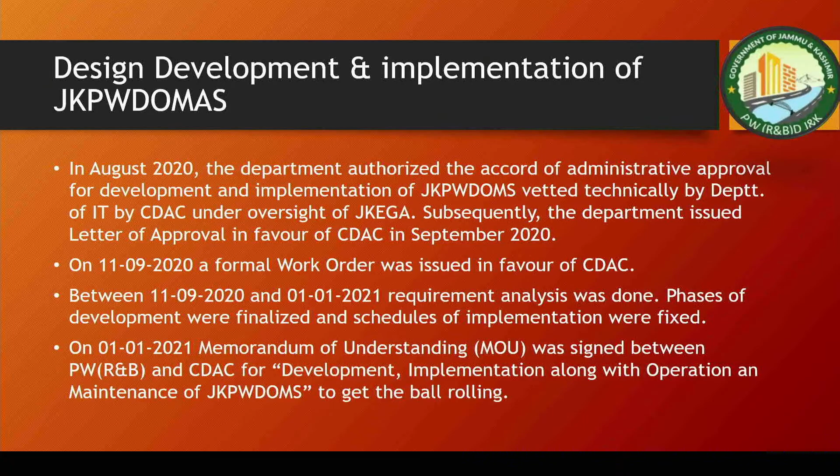So what was the scope? Scope was development of a web portal, then capacity building, change management, third-party integrations, API sharing, and operation and maintenance for 3 years after development. It was decided in August 2020, and CDAC came to an MOU with us on 1st of January 2021.

What are the different modules? Human resource, contractor management, infrastructure management, project proposal, tendering BOQ, project execution, quality control, safety audit, billing auditing, grievances, snow clearance, maintenance, mobile applications, letters and circulars. These are the different modules of JKPWD OMS.

So what is JKPWD OMS doing there? Enhancing accountability and transparency, operational efficiency, financial accountability, comprehensive project monitoring, strategic planning, data-driven decisions. These benefits are for the government, and for the general public, ICT enables people to participate and give feedback, transparent communication, grievance redressal, efficient snow clearance.

As of October, we have more than 16,000 employees whose data regarding their transfers, their posting history, their addresses, their qualifications are computerized and recorded in the system, and roles are given as per their designations. More than 2,500 bridges, 11,000 buildings, and 30,000 roads comprising 42,000 kilometers length.

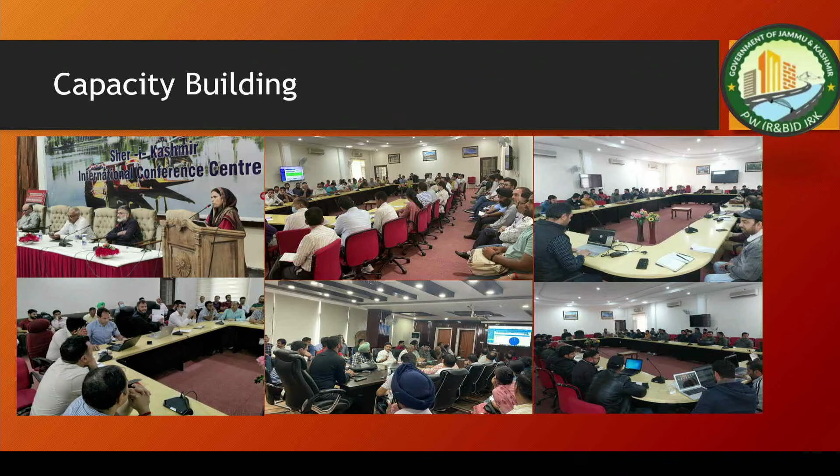There were so many bottlenecks which we had to tackle. One of them was capacity building, and it was a big challenge. Capacity building was the first and foremost thing for automation of this e-governance initiative, especially vital for users, that they should be well aware of the automation processes, taking full advantage of the software development. We have done capacity building in 8 phases. We visited every circle of the PWD J&K, where we conducted more than 240 trainings. Around 1,800 master trainers we have created in every zone, and more than 250 contractors were also trained.

To bring any change from the conventional method to this IT-enabled method, the crucial role is always with the heads of the management. They should be motivated first, and the will to do it has to be there. Once these two factors are there, it is an easy affair to make the change.

Overcoming the challenges: there's privacy and security, interoperability, because there are so many other IT initiatives in J&K and at the national level which need to be integrated with the system. We are working on them, and some are already integrated. There were challenges of training and infrastructure, and overall implementation of ICT.

As already discussed about privacy and security, we have to rethink information security policies, overcoming challenges every new day. There is a challenge related to security for all software, not for JKPWD OMS only, but for all software worldwide. So, how to mitigate them? Implement important steps of reviewing the existing information security policies and developing a new policy statement addressing the risks to electronic information.

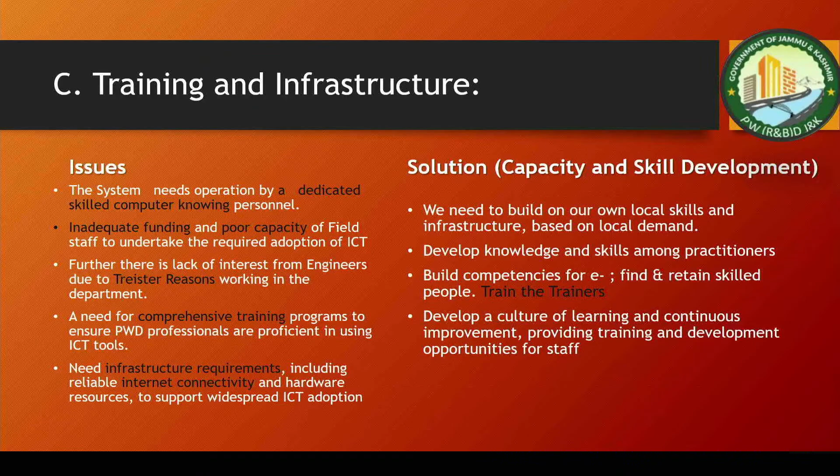There are areas to upgrade infrastructure also, where we are currently doing that. We are upgrading our servers, robust firewalls, and endpoint protections. So, in this implementation, the issues were inadequate infrastructure in the early phase, insufficient access to internet by the majority of the population, lack of requisite skills to use them, lack of resources, lack of a comprehensive policy on ICT. So these are the solutions we are working on right now,

and we have future strategies like using platform as a service, software as a service, mobile platforms, smartphones, geospatial data. We are moving towards integrating JKPWD OMAS with PM Gati Shakti, using IDs for our road infrastructure, and the same unique IDs will be transferred to PM Gati Shakti for integration. And we are hoping for integrations with NCOG, Darpan, Pragati, these different web portals, central government initiatives. And these recommendations are for our state.

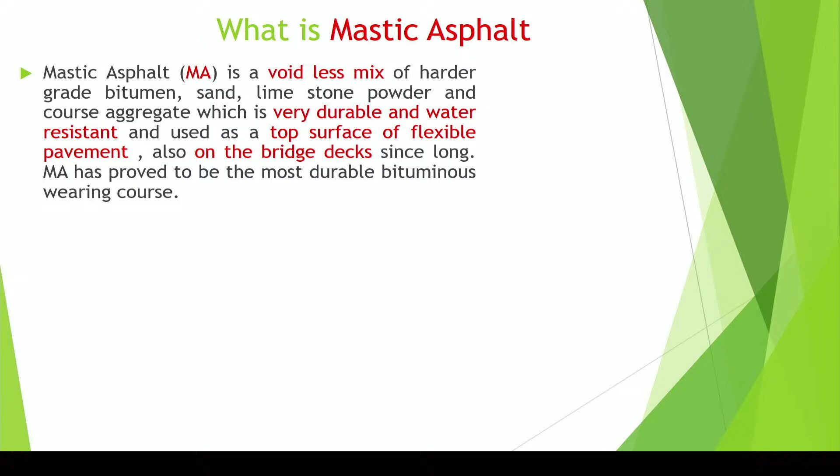Mastic asphalt is a voidless mix of harder grade bitumen, sand, limestone powder, and coarse aggregate, which is very durable and water resistant, and has been used as a top surface of flexible pavements and also on bridge decks worldwide for a long time. Mastic asphalt has proved to be a very durable, rather the most durable, bituminous wearing course. It has been successfully used in the city roads of Kolkata and other parts of West Bengal since the 1980s, especially in areas with waterlogging problems.

It is used as a wearing course on bridge decks, as I've already told, all over the world, and also in our capital city of Delhi. I have seen the application of mastic asphalt in the roundabouts and parking bays. In Europe, mastic asphalt is very popular. In many countries, mastic asphalt is being used. Especially in Germany, the terminology is a bit different. They call it gussasphalt, and they are using it on their autobahns, their expressways.

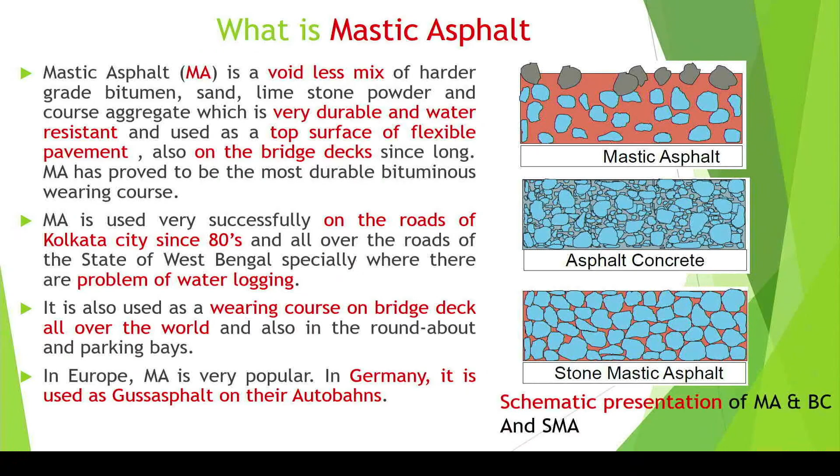Also, this is the schematic of mastic asphalt compared with other dense graded mixes. In mastic asphalt, the specialty is that the continuous phase is the mastic, with a higher percentage of bitumen and also filler and fine aggregates. That's why it is water resistant. In the other varieties, we can see some percentage of air voids is specifically kept, and in stone matrix asphalt, the main philosophy is stone-to-stone contact, thereby achieving a rut resistant wearing course.

Some pros and cons of manually laid mastic asphalt: because conventionally it is manually laid, the initial cost of mastic asphalt is a bit more compared to other bituminous mixes like BC or SDBC.

But the life cycle cost, if the durability of the mastic asphalt is more, if the life cycle cost is seen, it is around 10 to 15 years. I will show you photographs where we have gone up to 30 years even. So that way, life cycle cost from that angle has to be seen. If a well executed mastic asphalt, it can give you life without any maintenance for 5 to 7 years.

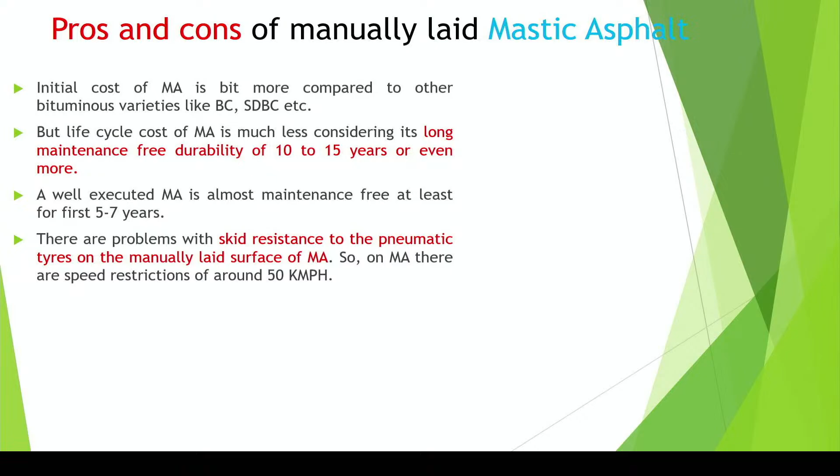There are problems, but the main problem with manual mastic asphalt is the skid resistance, because the anti-skid materials are grafted manually, and after some time these anti-skid materials disappear. So speed restriction is there, especially in the rainy season for two-wheelers. The safety issue is there.

But the main problem is from the environment point of view, because manual mastic asphalt is being cooked in a very small cooker without any environment pollution control units fitted in. So a lot of air pollution is occurring. The workmen are also exposed to the fumes continuously coming up from the mastic asphalt.

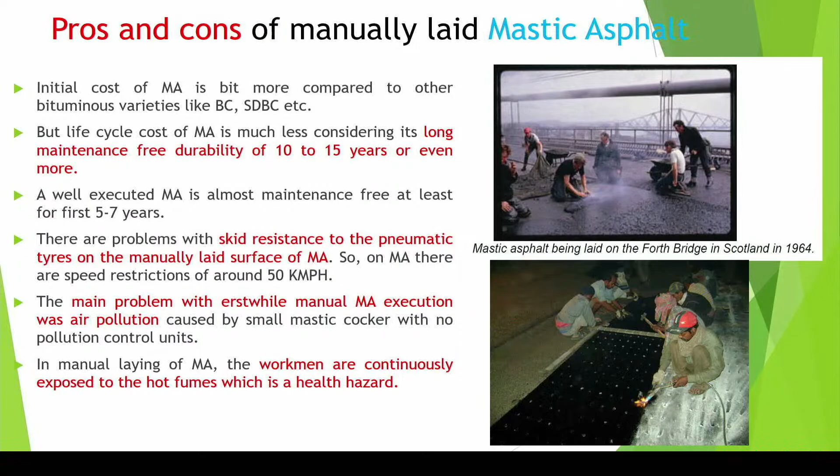The photograph is showing this from Scotland in the year 1964, and this is the kind of work we are doing so far in our country.

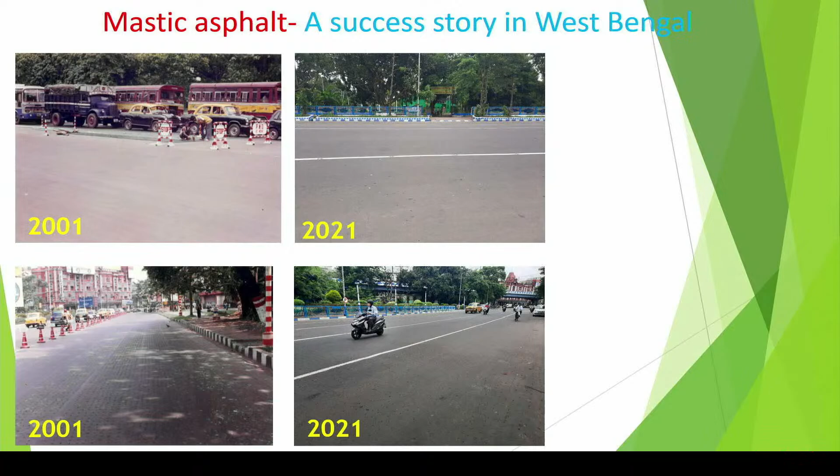The lower photos are of the other end. This is the famous Mayo Road in the Maidan. When this was done in 2001, I was actually an assistant engineer. I undertook this project, and still now it is going on without any maintenance required. So that is the beauty of mastic asphalt we have actually experienced in the city of Kolkata.

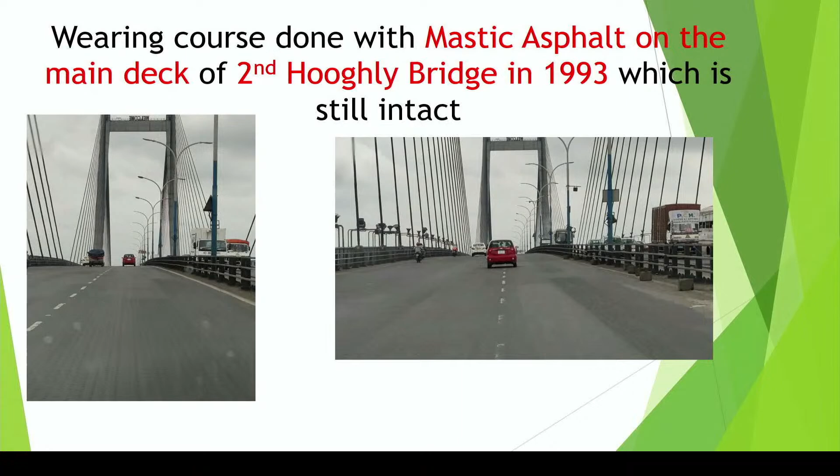The same thing was there in the famous second Hooghly Bridge, the Vidyasagar Setu. It was built in 1993, and till 1.5 years back, it has been renewed. So 29 to 30 years it has given service, this mastic asphalt.

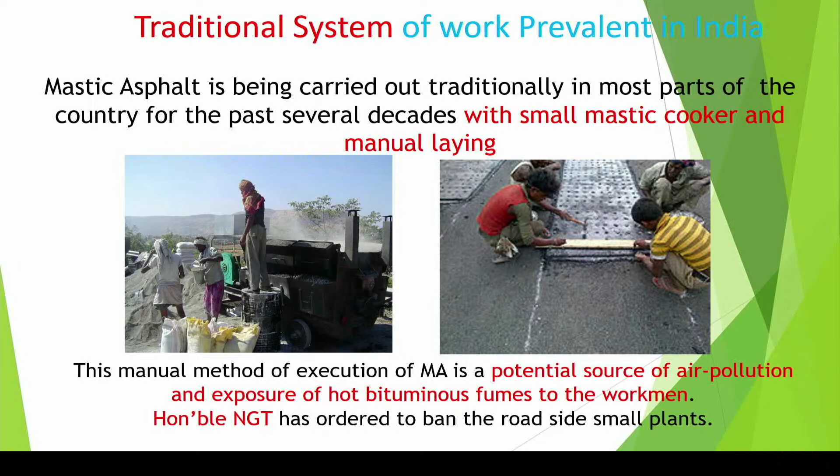But this is the traditional system prevalent in India for executing mastic asphalt. This is the way we execute it. I have already discussed the problems, and because of that, the Honorable National Green Tribunal put a ban with an order on 18th September 2018. They put a ban on all hot mix plants.

After that, in 2020, we could establish before the Honorable NGT that not all hot mix plants should be banned, because worldwide this hot mix asphalt technology is being adopted. After proving this, giving documents to the NGT, they verified it from CRRI and Kharagpur IIT, and they allowed us to use the hot mix plant.

But as per the recommendation of the CPCB, Central Pollution Control Board, they put a ban on the spot mix plant, roadside spot mix plant, where your small mastic cookers also come. In the meantime, we proved in the National Green Tribunal that we have taken up so many environment friendly works like micro surfacing, white topping, and this one also.

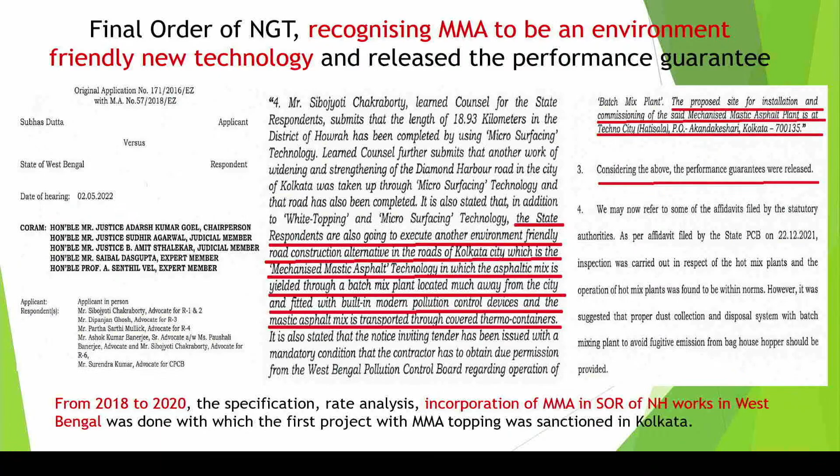In the meantime, I prepared all the technical documents, collected the rates, especially the mechanical part of it, formulated and got it incorporated in the SOR, and we took up one project in Kolkata, especially under the push, I should say, of the NGT. We had to take it up.

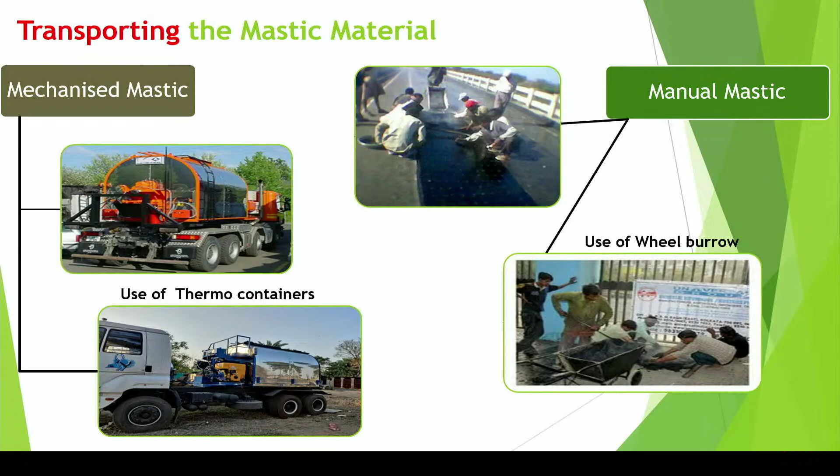And laying of the mastic asphalt is done for the mechanized version with a paver, so naturally the riding quality is improved. Whereas for the manual process, since it is manually laid, there are issues with riding quality.

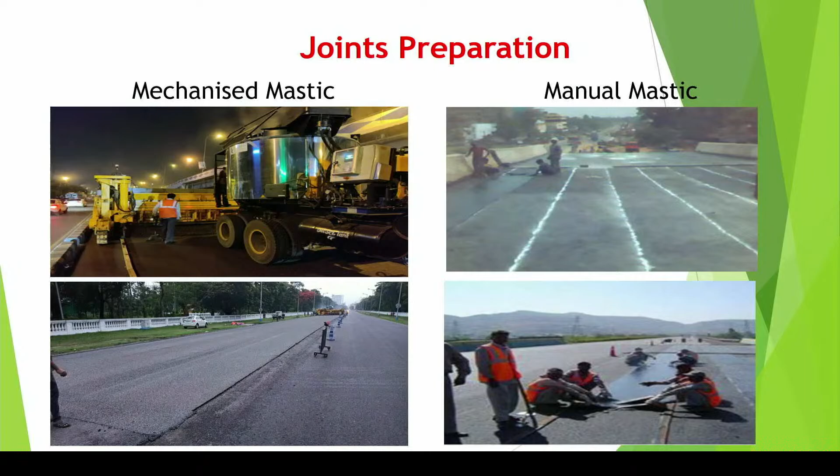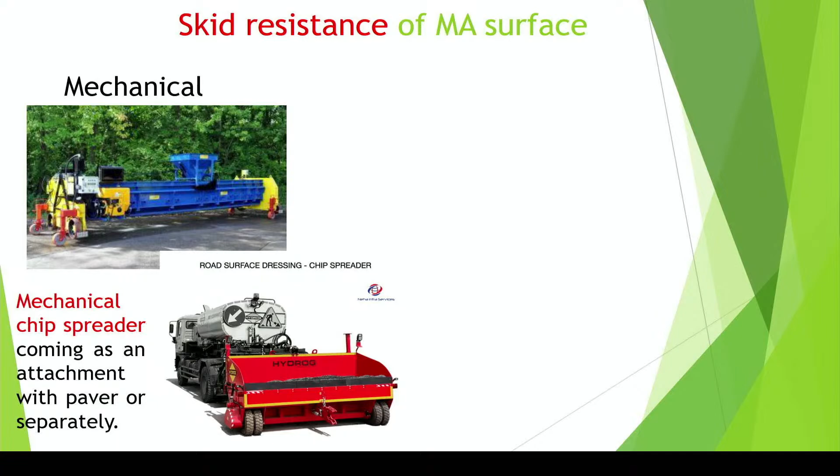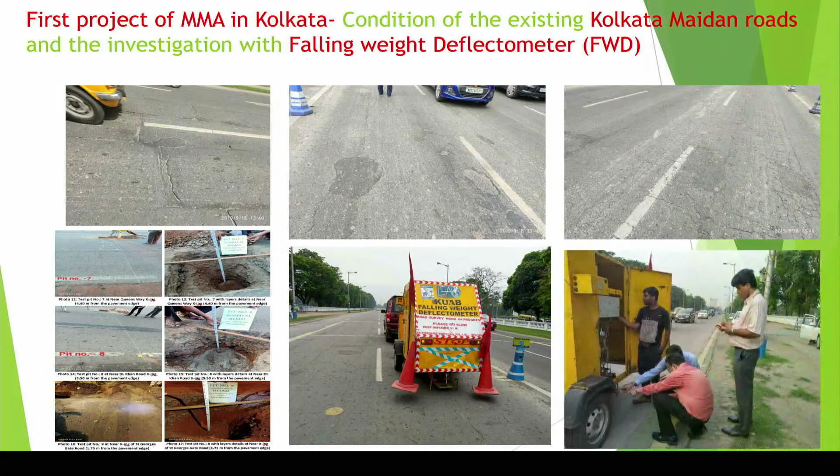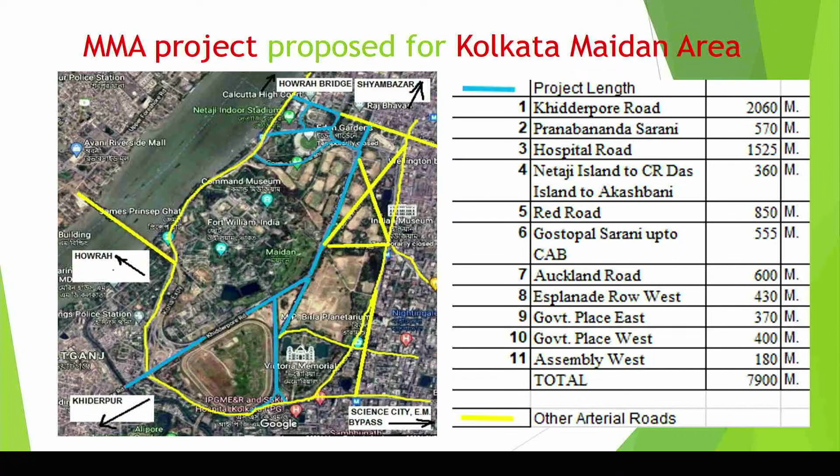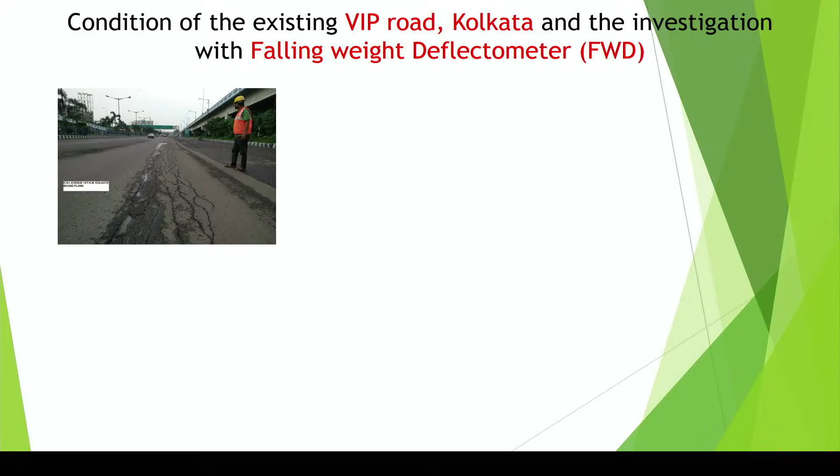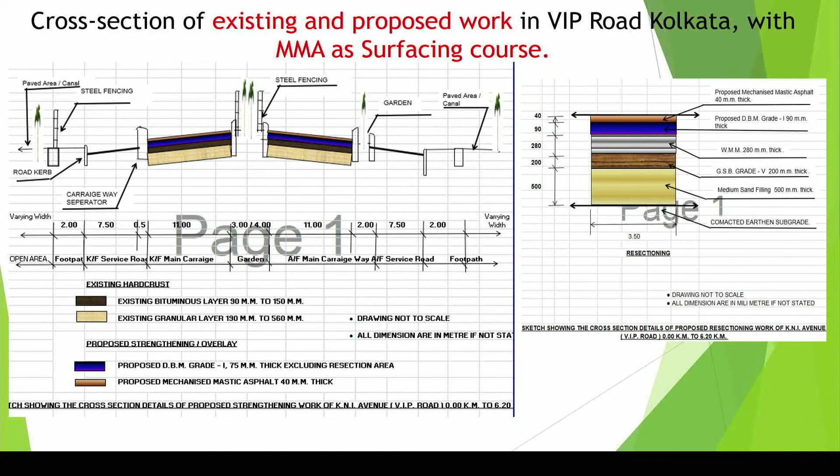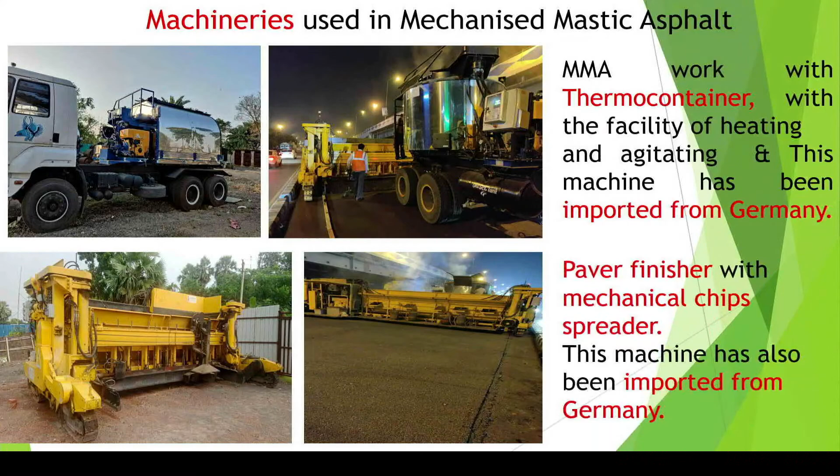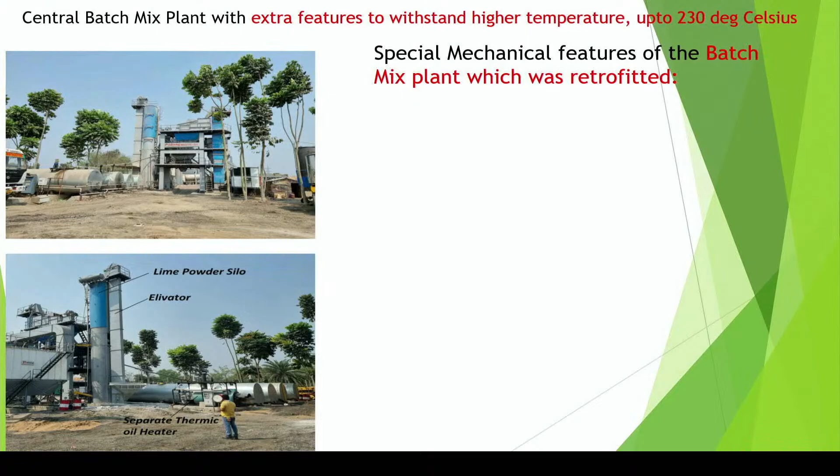One thing is that in a normal batch mix plant we deal with a temperature of 150 to 170 degrees Celsius, whereas for mechanized mastic asphalt, the temperature can go up to 230 to 240 degrees Celsius. So a lot of mechanical improvisation had to be made and retrofitted. These are the points on which the mechanical improvisation has been done.

Also, for the mechanized mastic asphalt mix, the percentage of lime filler is much more than in conventional bituminous mix. Conventional bituminous mix has around 2 to 3%, and here it is 17 to 18%. So a large amount of fine material, like very fine filler, has to be incorporated, and the silo has to be made that way to pump this higher amount of filler.

A separate thermic heater has been provided, with insulated asphalt drum, insulated hot bin, optimum raw duct, and there are a few more - the screw conveyor is also equipped with thermal heating, like an insulated hot elevator. These are to take care of the higher temperature.

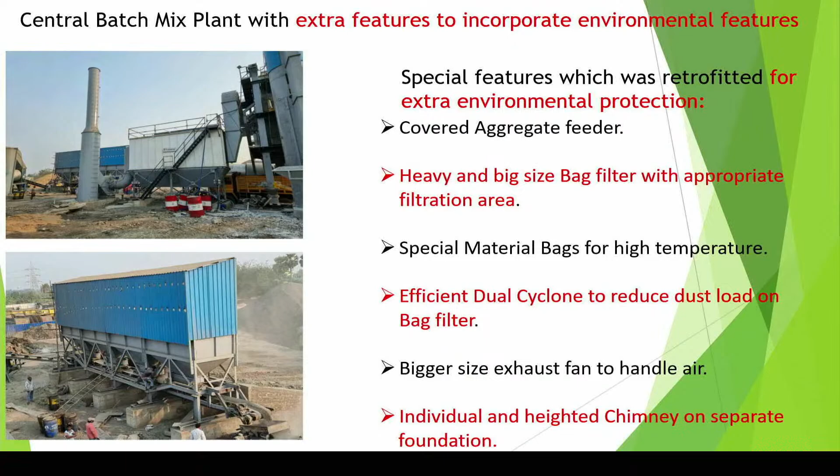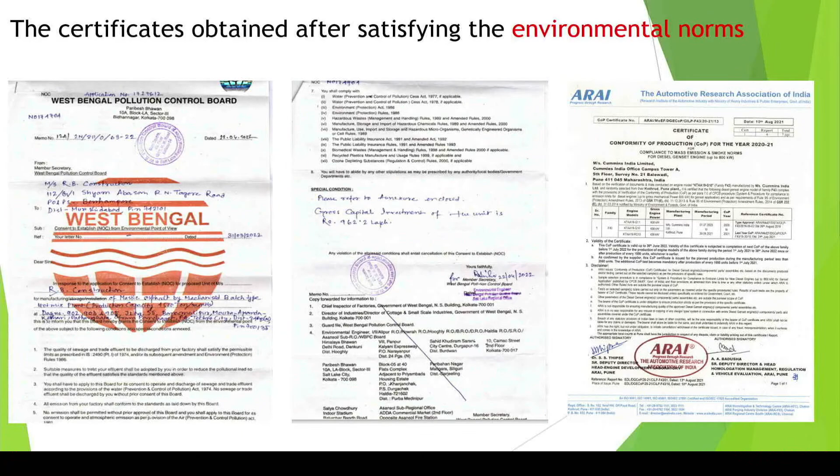For the diesel generator set, we have also obtained the pollution control certificates. Now for the civil engineering aspects of the mechanized mastic asphalt.

The mix design is as per the prevailing norms of code IRC 107: lime powder is around 17 to 18%, river sand 32 to 33%, coarse sand is 40%, and bitumen of industrial grade, much harder grade, is 9.8 to 10%. The criteria for fixing different components is as per the prevailing norms of the hardness number, specified from 10 to 20. But I believe there are a lot of rooms for improving this criteria.

Several other performance-based criteria like wheel tracking test and impact loading test have been carried out. Molds were taken, and IIT Kharagpur was also associated during the execution of this project for development and research work. One student has been assigned a PhD thesis for this. He took all the molds and has taken a break for joining his service, but we expect those molds will be tested soon and all results for the performance test will come.

But on the field, this is what we are receiving. I will show you the photograph. Let me share the photos with you.

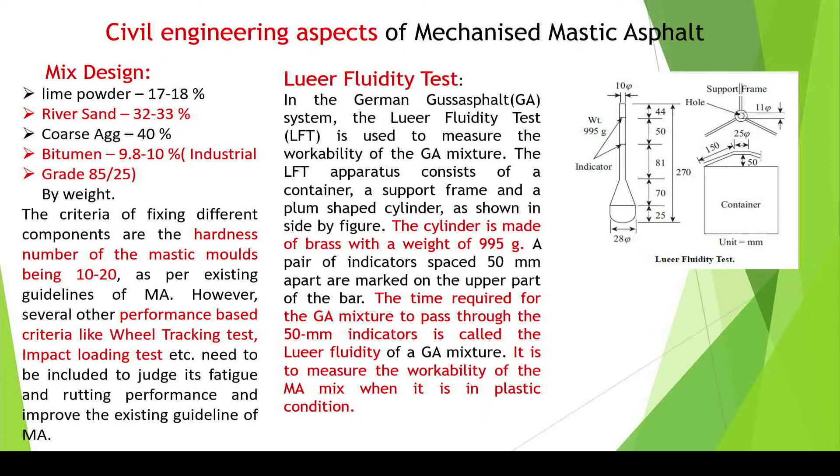Regarding the plastic state of the mastic asphalt, when it is plastic, there is one improvisation made as per the German Gussasphalt system, that is the Lueer fluidity test. As per this photograph, it is a plum-shaped brass cylinder weighing around 995 grams, with a specified 50 millimeter dip. The time noted for dipping this cylinder 50 millimeters defines the consistency of the plastic mastic asphalt. It is also very important for the skid resistance to be embedded, so it is well defined, and there are rooms for research and specifying this criteria.

The very important thing, as I was already talking about, is skid resistance. For manually laid mastic asphalt, the anti-skid materials are grafted onto the surface while it is still in plastic condition, but there are issues with the early disappearance of the anti-skid material. In the code for mechanized mastic asphalt, Professor Bose drafted the previous 2013 version code, and it is specified on the back of that code.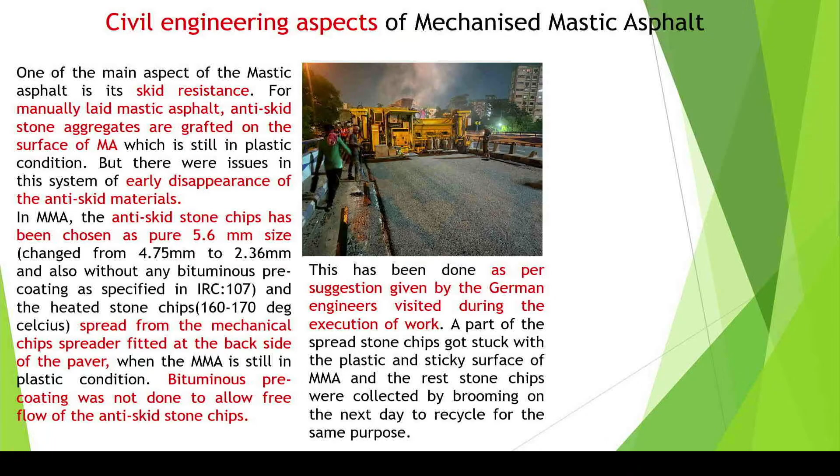We have also done the skid resistance test. IIT Kharagpur has done it, and the results are within the specified limit. This is a video I recorded, and my voice is also there.

Mechanized mastic asphalt is in operation. This is carried by thermo containers and laid on the road by the paver. It is actually a bit different from the conventional pavers.

It is the second of its kind in our country after Mumbai. The paver machine proceeds very slowly; the speed is maximum up to 5 meters per minute.

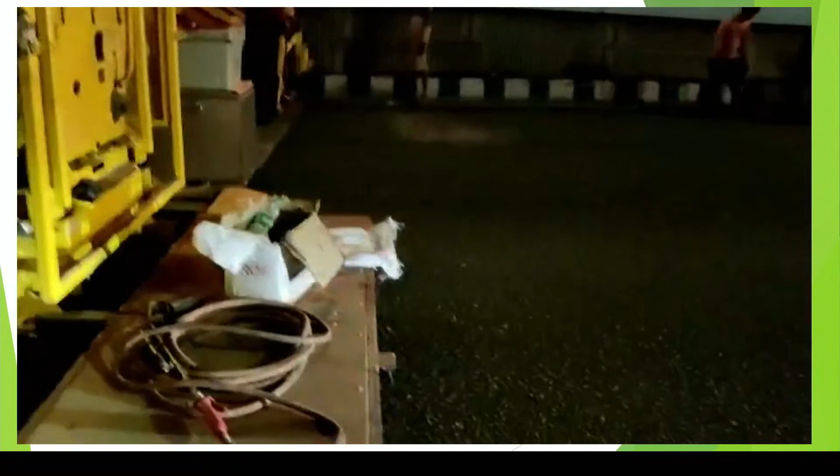You can see the anti-skid chips, stone chips material, being automatically spread onto the surface and getting stuck as the anti-skid material, giving a beautiful skid resistance. I'm recording the video.

One point: in the code, it has been specified that the anti-skid material has to be pre-coated with bitumen, but we have not done that, to allow the free flowing and spreading of the materials. That we have done.

Some of the projects completed in Kolkata city include the famous Red Road, shown here in night vision, and also the iconic Second Hooghly Bridge. The previously laid, 30-year-old manually laid mastic asphalt there has worn off, and this new mechanized mastic asphalt has been laid.

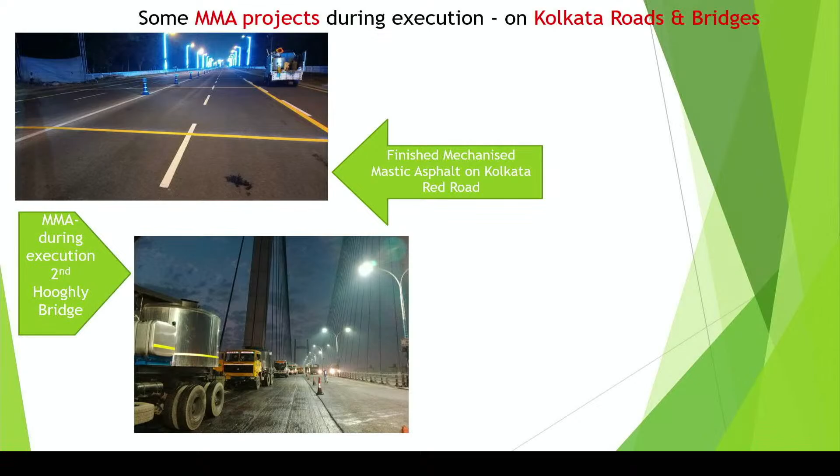And this is also the famous Howrah Bridge. Over that too, the mechanized mastic asphalt is laid.

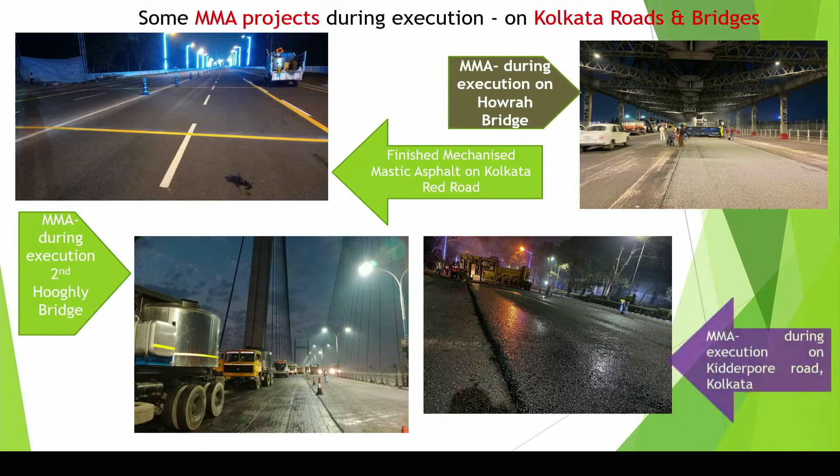And this is another road here, Kidderpore Road, where the mastic asphalt is laid. Now the cost comparison, this is very vital. I'm quickly going through the conventional stone matrix asphalt, comparing apple to apple. So per square meter, for 40 millimeters, it is 550 rupees per square meter.

Bituminous concrete is 503 rupees per square meter. Manual 25 millimeter is 820 rupees, and 40 millimeter is 1309 rupees. Whereas the mechanized version, you can see from manual to mechanized, there is not much difference, because in the mechanical side, the machine part is more, but we have reduced the labor part. So it is not much of a comparison.

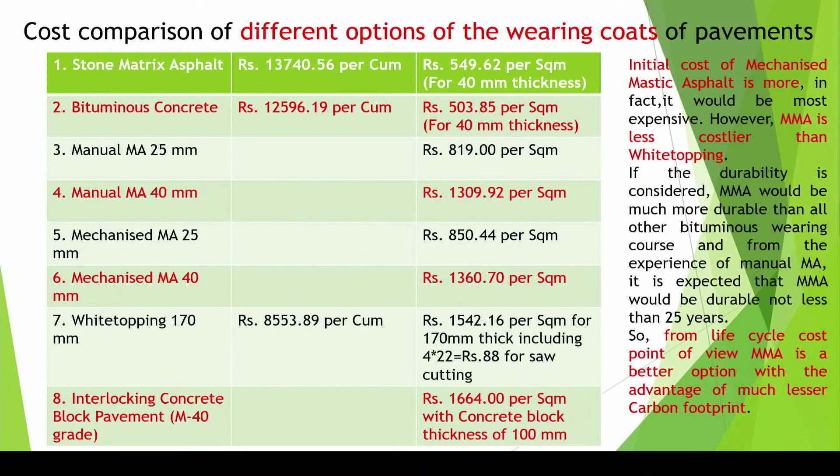So I believe this item, mechanized mastic asphalt, has got a very good potential if we use it. The concluding remarks are that mastic asphalt is a very durable and successful wearing course, which we have applied in the city of Kolkata, with some improvisation from the prevailing norms of the code. It is giving good success for waterlogging areas especially.

Honorable NGT has put a ban on manual mastic asphalt. Manual execution is slower, and the riding quality is also an issue. Mechanized mastic asphalt is an established technology, extensively used in Europe, where environmental pollution is kept within permissible limits, the rate of execution is much faster, and the riding quality becomes very good. Kolkata is the second city after Mumbai in our country for execution of this mastic asphalt.

Considering the durability and life cycle cost analysis, mechanized mastic asphalt is very good, to conclude. This is the last slide. There is an international mastic asphalt association also. Almost all European countries are members of it, and China and Japan are also members.

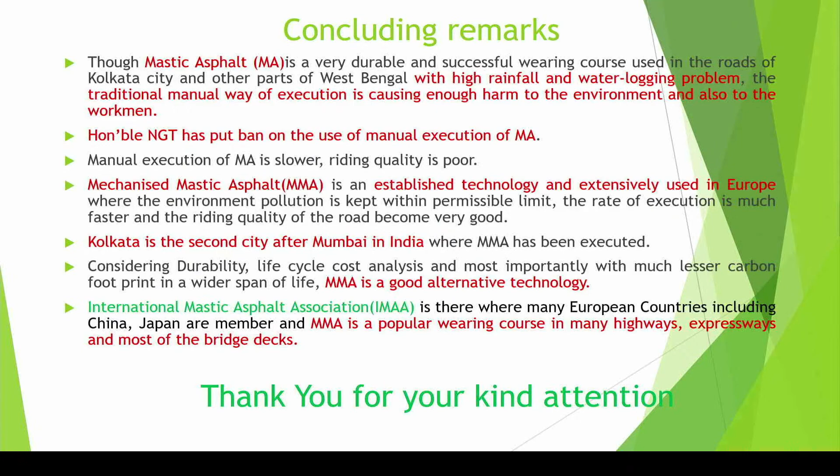This is a very important and useful presentation, because normally we avoid using mastic asphalt due to the lot of manual processes required, cookers and all these. Now he has suggested using mechanized mastic asphalt. So now the floor is open for questions, if any, and comments.

Take the questions on this presentation, if any, on both lectures. I can wait and take the questions right now, but I will seek the permission of the respected chair, because I have to go for a meeting, so I may have to leave with DG sir, so I may leave in between the session. Myself Premnath, superintendent engineer from Bihar Road Construction Department.

Sir, it is very good to apply mechanized mastic asphalt, but there are two challenges. One is retrofitting of the batch mix plant, which is a big problem. Second thing is educated operators. These two things are big challenges for the road sector.

Naturally, you have to face challenges if you want to do something good. So challenges you have to face, but what I believe, it is all in the mindset. If we believe it will be implemented, you can. Regarding retrofitting approval, it is not there specifically; we have depended on the end result. We have got the pollution control board certificate, where all environmental norms have been satisfied.

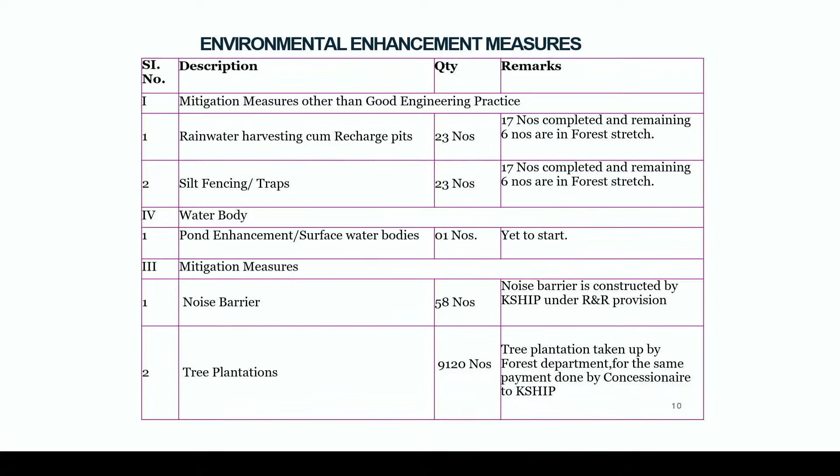In high embankments, retaining walls are constructed along with toe walls.

Bioengineering measures include vegetation in conjunction with civil engineering structures, shrub and tree planting, roadside avenue planting, brush layering, and grass sods like vetiver grass used on slopes wherever high embankments are present, to prevent soil erosion.

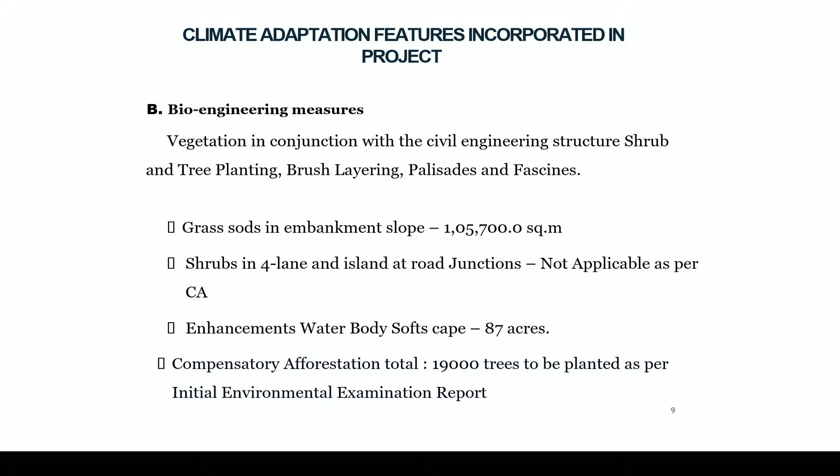For water body enhancement, one big lake of 87 acres has been chosen, along with compensatory afforestation. A total of 19,000 trees have been proposed for planting, and almost 90% of them have already been planted.

Sound construction management and mitigation help reduce carbon emissions, with sequestration achieved through natural processes like afforestation and borrow pit restoration, while preventing unwanted activities like hill cutting in forest and wildlife areas.

About 18 kilometers of forest has been taken up for improvement in this project, where around 12,000 trees had to be cut due to realignment. Due to a recent decision by KSHIP top management, they decided to go with the existing alignment so the number of trees cut could be reduced to 2,000, which have no significant forest value. That is one measure they have taken.

We have to preserve trees because they already exist along the side of the road, with a lifespan of 50 to 100 years or even more. It is very difficult for us — for three generations we would lose the benefits from the trees if we cut a larger number of them.

Moreover, speed restrictions in the forest area are definitely going to be imposed because of wildlife movement, which would otherwise get disturbed. In elephant corridors or other eco-sensitive zones, speed restrictions will be up to a maximum of 40 to 50 kilometers per hour, and we cannot travel faster than that.

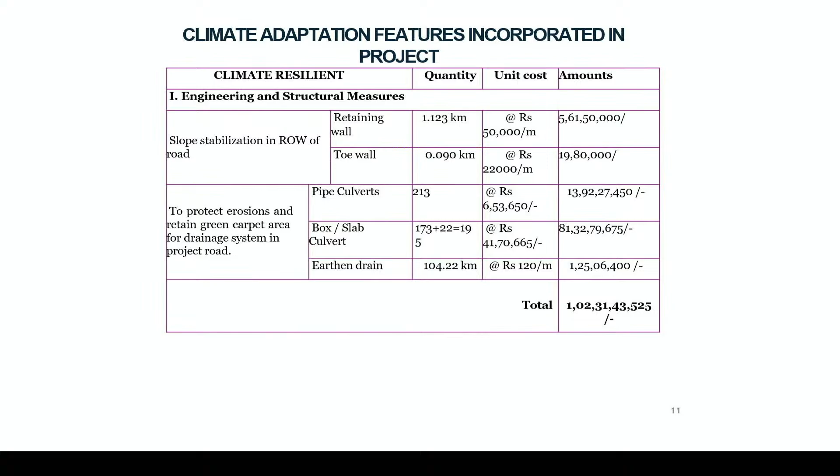And these are the bioengineering measures. Grass sods, that is vetiver grass, have been provided, and borrow management: after the gravel has been removed from the agricultural fields wherever the agreement was done with the farmers, that was made good to cultivate again, to start the farming activities. So in order to prevent the soil erosion, that was restored.

Then water body enhancement: in that, desiltation of pond, stabilization of slope by vetiver grass, phycoremediation of water using algae, turfing, and sitting arrangements with walking track, pathway, playground for children, and some important plantation will be done there.

So impact identification and assessment. During the initial environmental examination, the soil, noise, water body, parameters affecting the quality of water, the soil contamination, the erosion of soil, all those factors are being studied, types of soils and all.

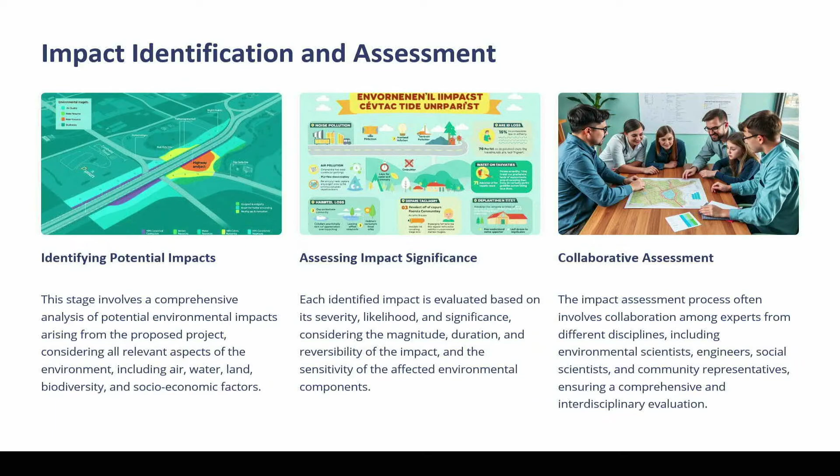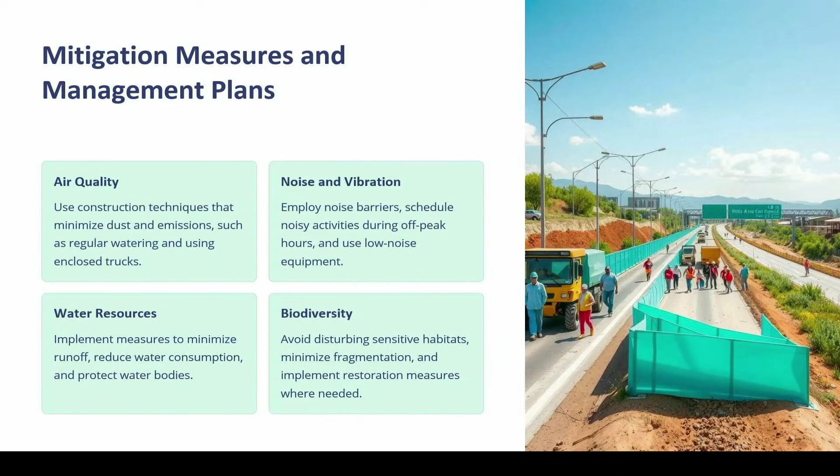So mitigation measures: air quality has been tested during the preparation of the initial environmental examination, and during the construction phase, every quarter air quality parameters have been checked, noise and vibration parameters have been studied, water quality has been tested for the surface water as well as groundwater, and biodiversity has also been studied.

So during the construction activities such as vehicle emissions, dust will come because of the excavation and embankment, rolling of the embankment and all. So water tankers and sprinklers will be used to mitigate the dust. And increased traffic volume from the highway worsens air pollution levels; that will also contribute to the PM 2.5 and PM 10 because of the dust, and that will affect the public very severely.

Noise levels also will increase because of the machineries, and after completion, the density of vehicles will increase, so it will significantly contribute to the noise. And water resources: water quality will get affected because of the soil erosion and other things.

So these are the water resource management and water quality monitoring. Water quality monitoring is some 20 parameters as per IS 10500. As per the IS code, the 20 parameters have been studied and measures have been taken. Stormwater management: due to runoff, the soil erosion will be there. To prevent the soil erosion, sufficient measures have been taken, and I'll show you the photographs.

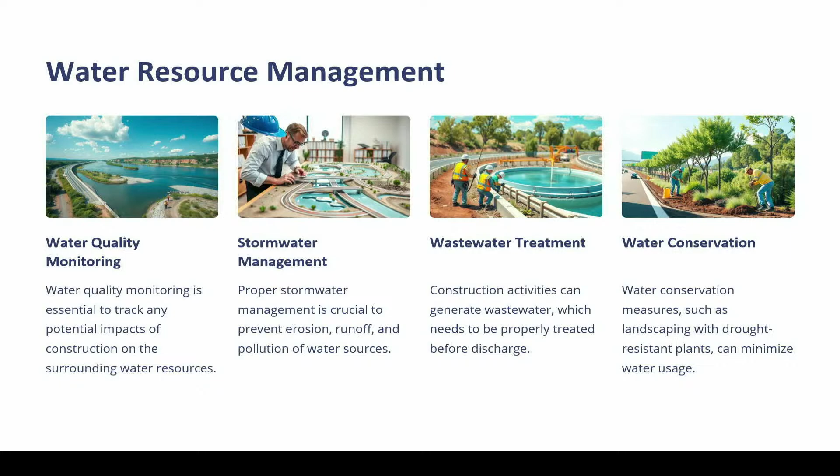Construction activities can generate wastewater in the labor camps, and that wastewater will be treated and reused. And water conservation, like landscaping, drought resistant plants, minimizing the water usage, and also the lake development will be there. Soil and land use management: vegetative stabilization, sediment control structures.

So construction waste: after scarifying, whatever material will come, that will be reused, and safe disposal will be done. Waste reduction.

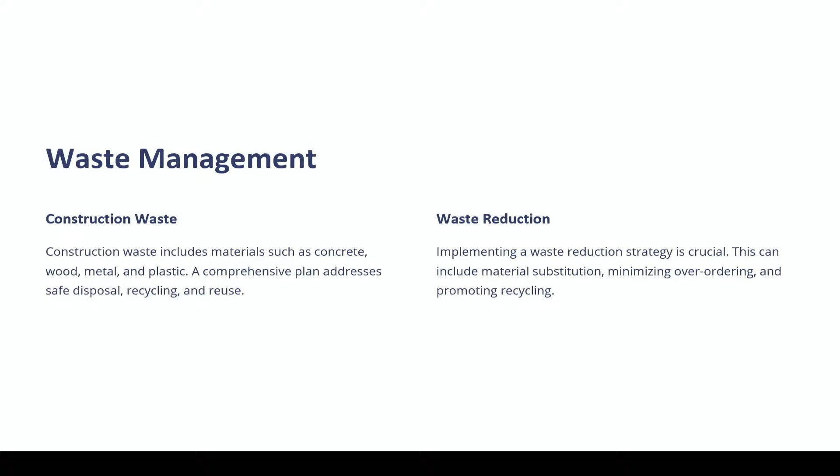So occupational health and safety. Safety of the workers is of prime concern during the construction project. Those safety aspects have been taken care of by providing helmets, earbuds, and other safety gears. Safe equipment operation was observed, and hazard identification and control by using safety features like barricades, markers, signboards and all. Then confined space entry procedures have been incorporated here.

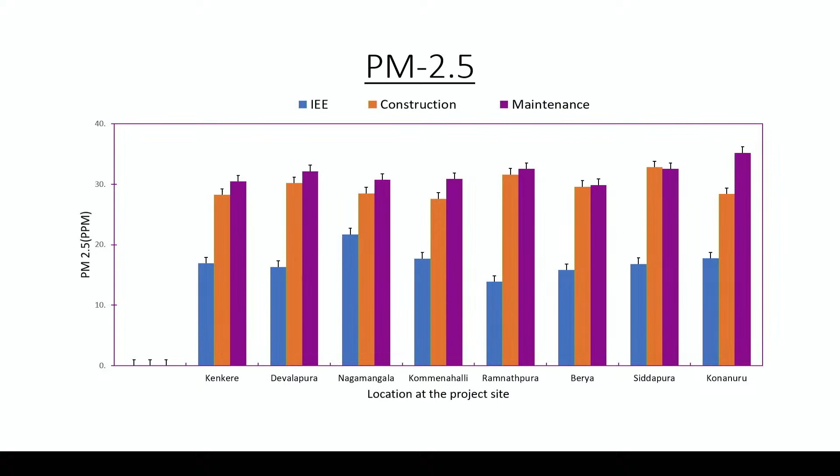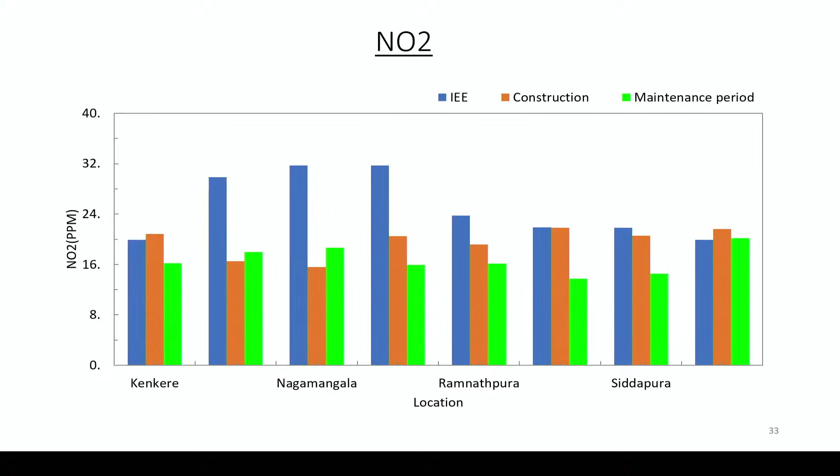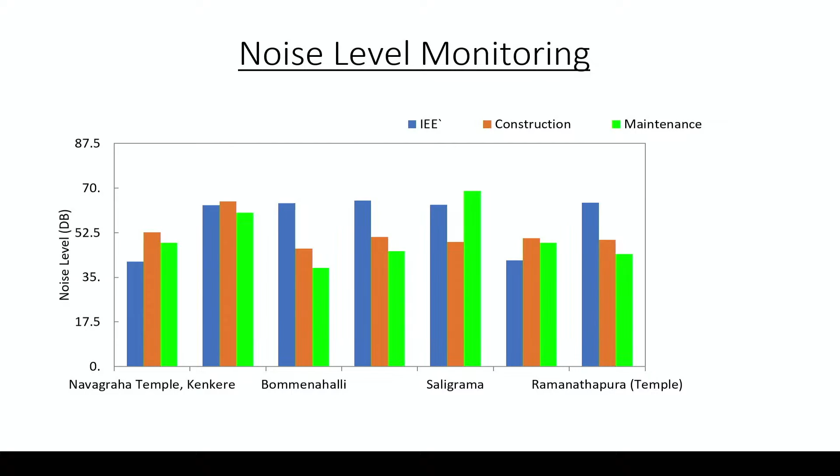Sir, please conclude. Okay.

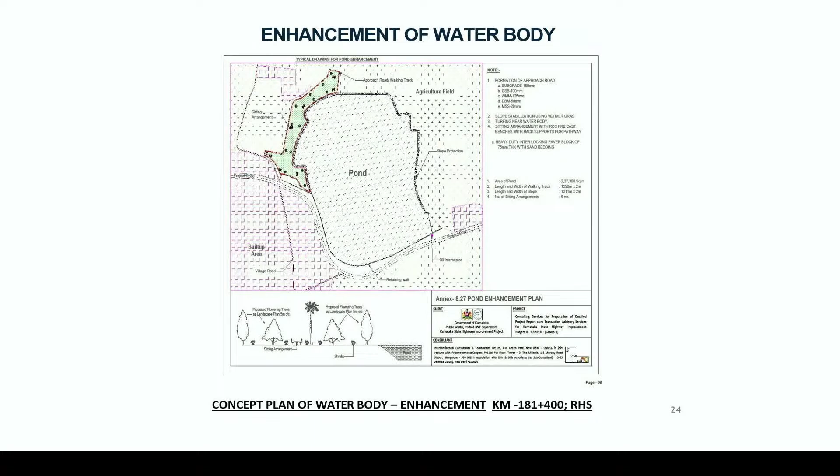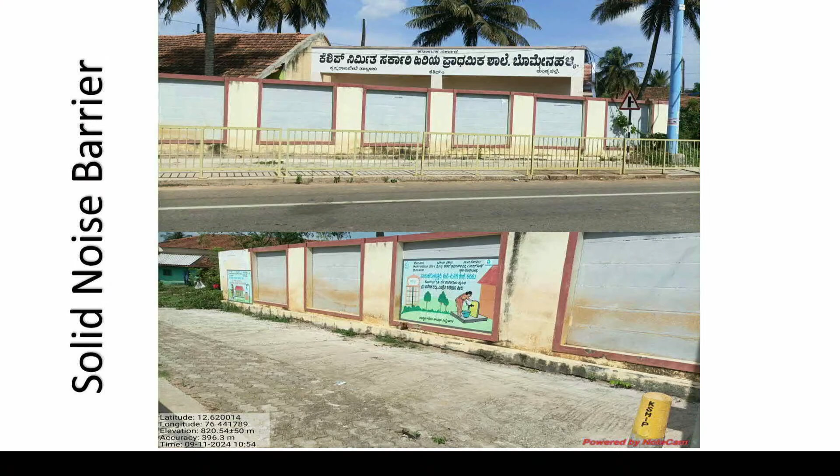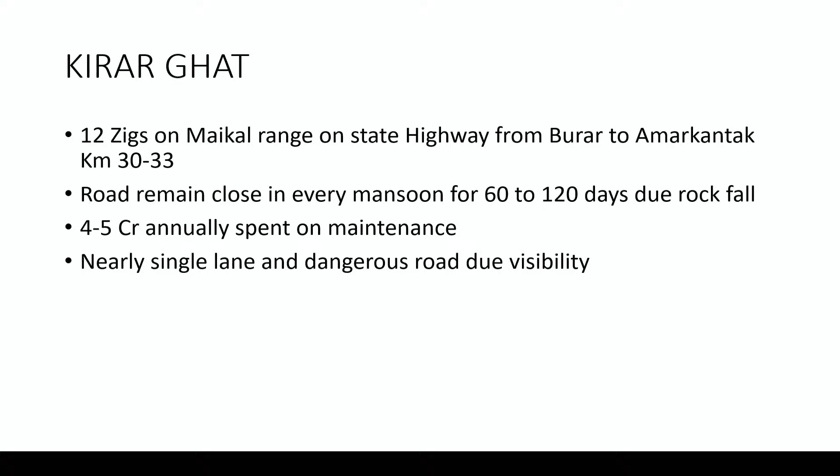So quite dangerous road. It used to remain closed for more than 60 to 120 days in every monsoon because the hill used to collapse, a lot of rockfall used to occur, and with that nearly 4 to 5 crores of annual maintenance used to occur every year for the small stretch. And the lane was reduced to nearly a single lane, very dangerous and with low visibility, like stopping sight distance and then overtaking sight distance. You forget about that thing.

So here, with the inspiration, we have gone for the Navachar. This is the new thing which we have done - toe wall and abutments on micropile and rock anchorages. This is to reduce the foundation cost. This is a really fantastic thing. I invite my research scholars to study this in detail. Although MANIT PhD scholars and MTech thesis students have already taken up these topics and few are working on it, together we can really reduce the cost of construction. Secondly is the anchor bulkhead breast wall.

This is really new. We have studied these things in our textbook - bulkhead supported retaining wall and the breast wall - but in practice we don't use it much. Whereas if you see that section, it becomes very thin.

And thirdly is the road safety wall using Z-shaped anchor.

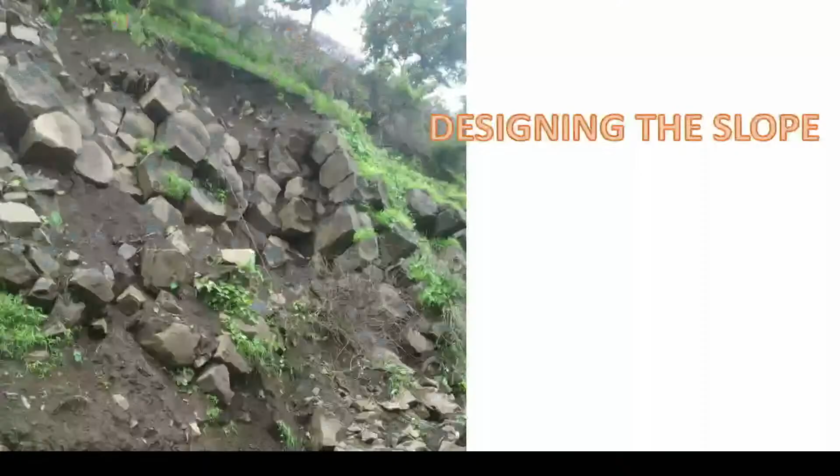As you can see, it's all bulging. So the pore water pressure - these are all big stone boulders weighing up to 20 to 40 tons. They used to fall with one small rain. So the slope was very dangerous, and you can see the curves are very acute, so very difficult.

And if you see, the strata is very, very fragile - even with the movement of monkeys. There is a Hanuman temple here, so with the movement of the monkeys also the stone used to fall. So forget about the rains - you can see the size of the boulders over here, and it's a fragile slope.

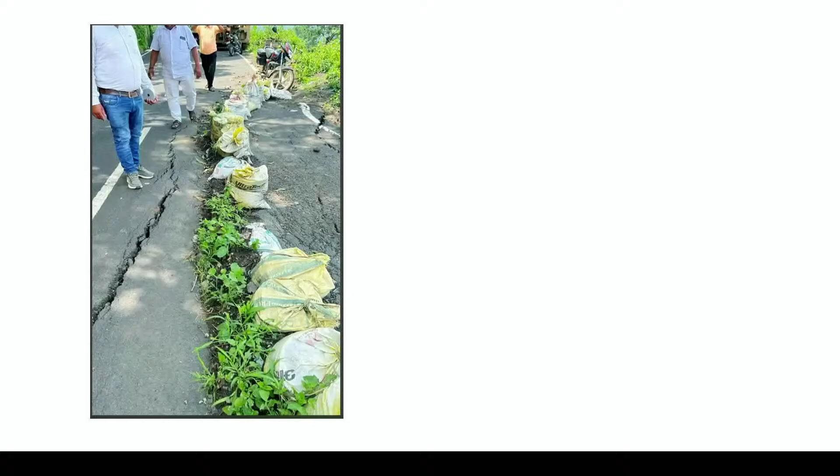You can see we tried to protect - we kept this so that at least small debris should not fall directly onto the vehicle, but that was also inadequate. And laterally we see a lot of slippage because the valley side slope was very, very weak. So there used to be slippage. Even if you construct a small retaining wall, it used to get tilted and collapsed. So these were the conditions.

So accordingly we have deployed so many teams. We have taken certain steps - firstly the geological study using our geological investigation survey map. In Madhya Pradesh we have a GSI institute. We have taken help of that, and help of many people.

Identification of the problem, design the solution, design the drainage system, soil nailing, rock bolting, open mesh jute geotextile, wire mesh, wire rope, toe wall on micropile, modified gabion wall, and turfing.

So after putting some effort, you can see a glimpse of that thing. It's a partially done work. Immediately during the monsoon, the slope turned green. And I tell you, in spite of the heaviest rainfall here - this area, our Kirar Ghat, is famous for very, very heavy monsoon, and this year particularly it had torrential rain - but not for a single day was the traffic ever blocked. Even a small stone was not moved.

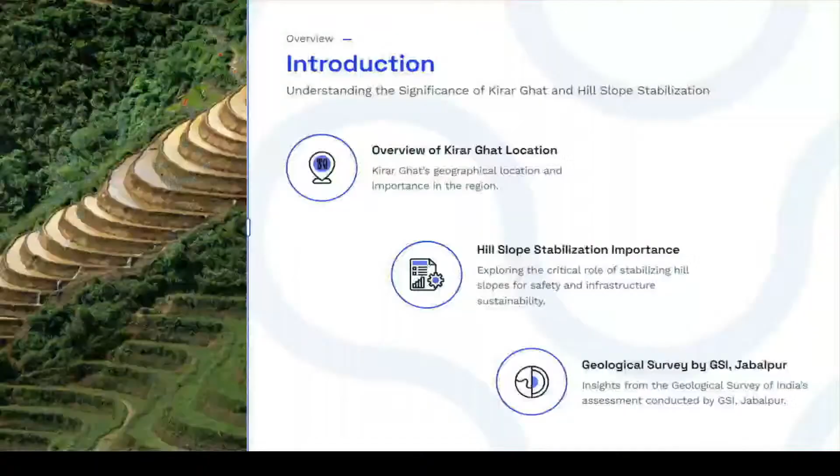Just because of this, you can see the ghat has turned - earlier it used to be a fragile slope with stones. I'll show you the video of how it was originally and what it has changed into. Just go patiently. I'll skip the time spent on the introduction overview of Kirar Ghat.

I'm leaving it there with the presentation - we can see it later on. Hill slope stabilization and its importance, geological survey by GSI Jabalpur - those are the reports. Institutional involvement - MANIT was involved for conducting the in-depth analysis using their research scholars.

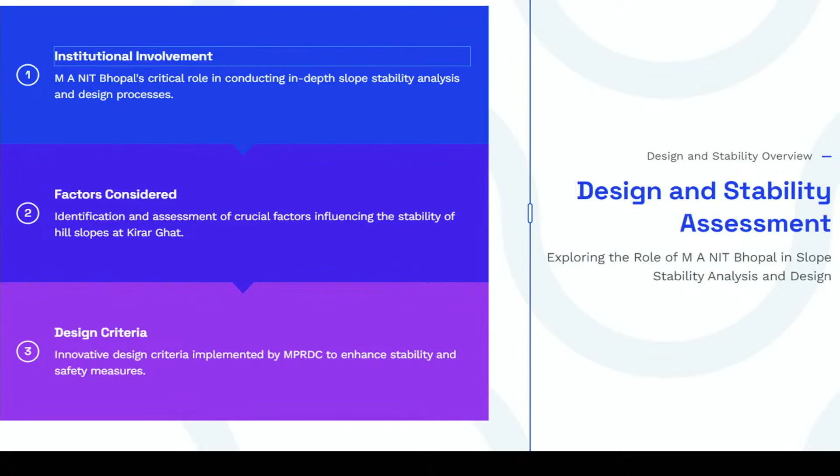Factor considered here is the identification and assessment of the crucial factors influencing the stability of the hill slope, and the design criteria. So innovative design criteria, after thinking out of the box, we have adopted - we did value engineering also here, mostly utilizing locally available material.

So one of it was that a small lot of boulders were available, so we had to rearrange it to make it stable. As you are seeing, there's a small fence laid here - that was also utilized to construct a breast wall.

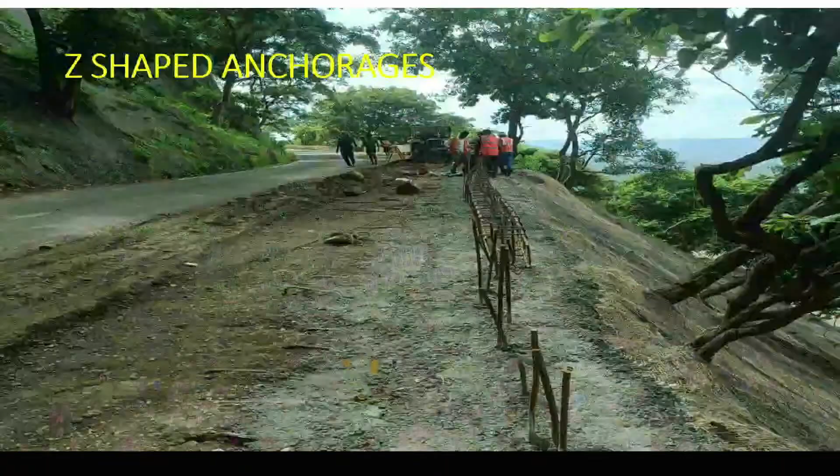I'll show you how. Similarly, the collapsible valley slope was also retained using a Z-shaped anchor. If you can see, these are the rock bolts - they've been bent like this and kept like this, with a beam over here. After putting the beam and this Z-shape, otherwise this slope was so unstable that if you constructed anything over it, it used to collapse. So now with a little bit of modification, this hill slope, if it is not collapsing, will also remain stable. So that is this.

It's a little better view. The treatment second layer - all these to be integrated by using a GI wire mesh, and thereafter concrete.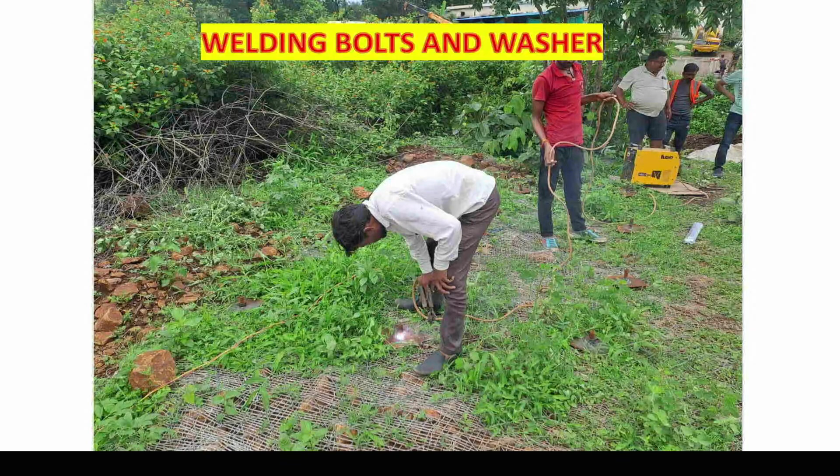The slope was also covered with a fine fabric called jute geotextile, along with rock bolts to integrate the system. So this green grass, the jute textile, wire mesh, and the rock bolt all together are integrating the mass in place.

Okay, now let's come to a little bit of theory. The ghat looks like a small section — I've taken about a 2 kilometer length, and along that there are about 10 more jigs. But these three were very critical, so we have stabilized these things this time.

As you can see, there is a nala crossing the road, and there is a small dam built by the irrigation department at the top side of it. So whenever it is flooded or over-flooded, the water used to come down all along the slope, and that was one reason the slope also used to move with the water.

So to check that, we first designed the slope to whatever slope was available. The slope is more than 80 degrees here. So all the stones are stacked one over the other, and these are to be kept in place.

So we have designed rock bolts, and thereafter there are other things, and the most important thing is the drainage. So the drainage, rock bolt, jute textile, wire mesh, wire rope mesh — all these things are integrated.

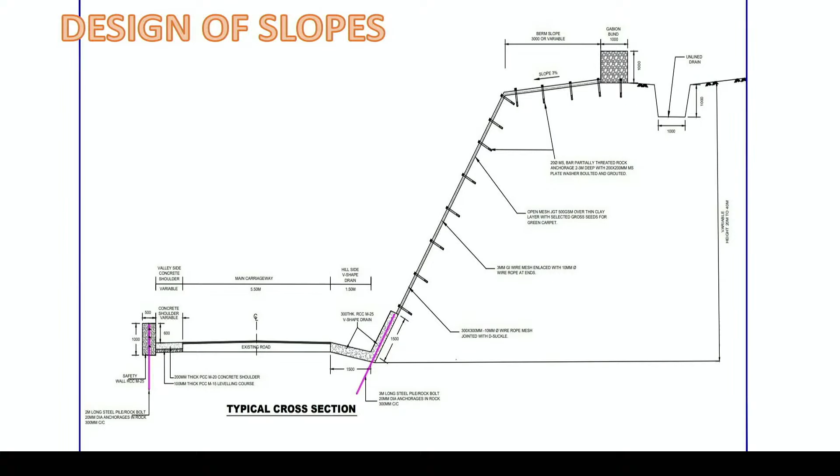Research scholars would find this interesting, although most engineers are not interested in these things. There are a few software tools which run together after putting in the data, so we can calculate the stability. So we won't go into too much detail.

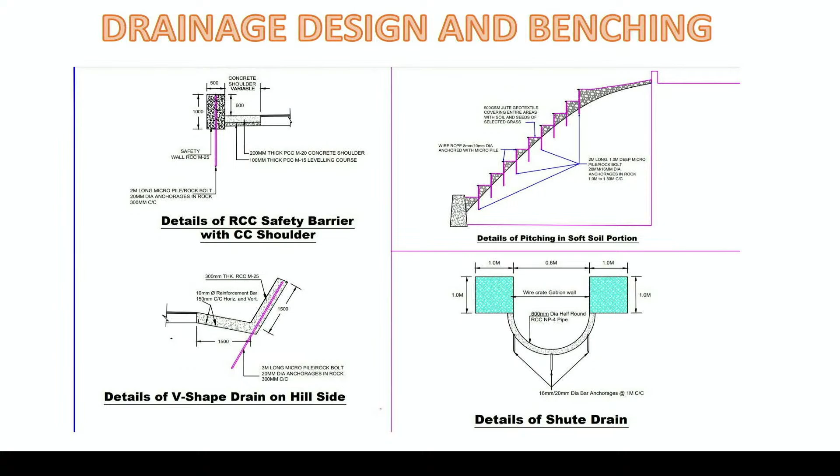The second thing we designed is a modified gabion wall. As the area was huge, the volume of the gabion wall was also very huge, so to cut the cost, we modified it. A gabion wall was made not with GI wire mesh, but with jute textile, anchored with small concrete and bolts, and wire rope. Similarly, the drainage system and a toe wall.

This is the jet-shaped anchored toe wall. This is the breast wall which we designed. It's about 9 meters in height.

3 meters of it is a micro pile of H-section, and 6 meters height, 50 centimeter thick breast wall using anchor bulkheads. You can see the anchor bulkhead — these are the horizontal bolts going into the rock mass.

This holds the breast wall in position. The thickness of the breast wall at the bottom would normally require around 6 meters for a 9 meter high breast wall — the breast width would not be less than 6 meters — whereas we did it with only 40 to 50 centimeters. So a lot of space as well as money is saved.

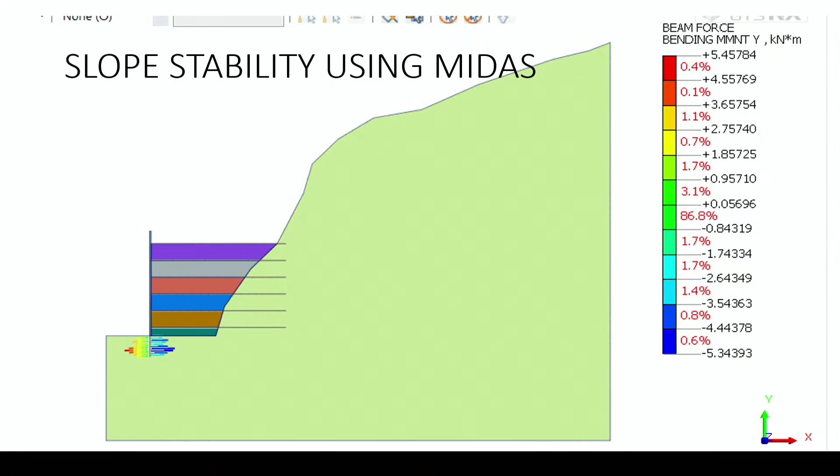You can see the stability analysis of this breast wall. By using software, we derived the force on each and every component, and the factor of safety for the most critical section is still 2.07. So it is stable even in the worst condition, and with the passage of time this will further improve because of the techniques we used.

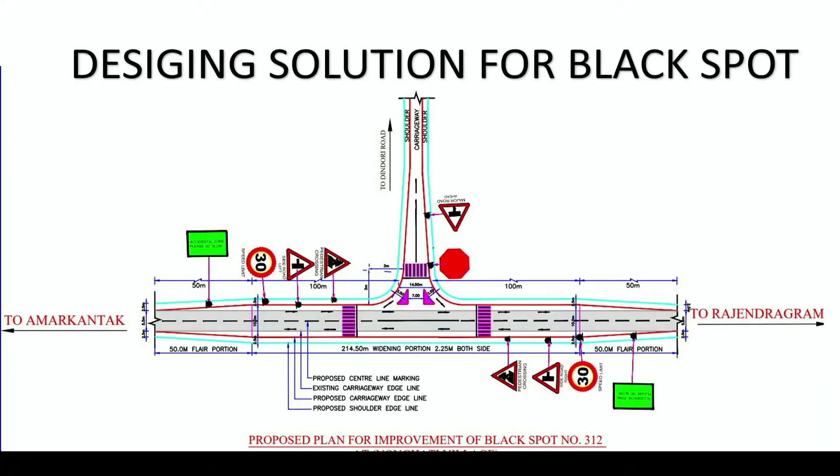We did the micro piling using toe wall and abutment. For road safety, the black spots have been improved and their geometry improved. The drainage from the hilltop — passages have been made onto the top of the hill, with huge drains made, so that water should not flow here and there.

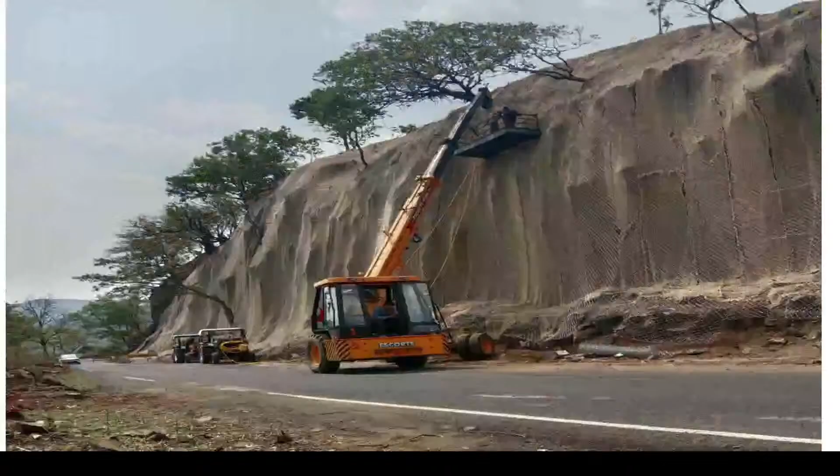The loose stone is covered with jute geotextile, through which most of the work has started getting stabilized, and grass seeds have been applied. There are the rock bolts and the jute textile placed in position.

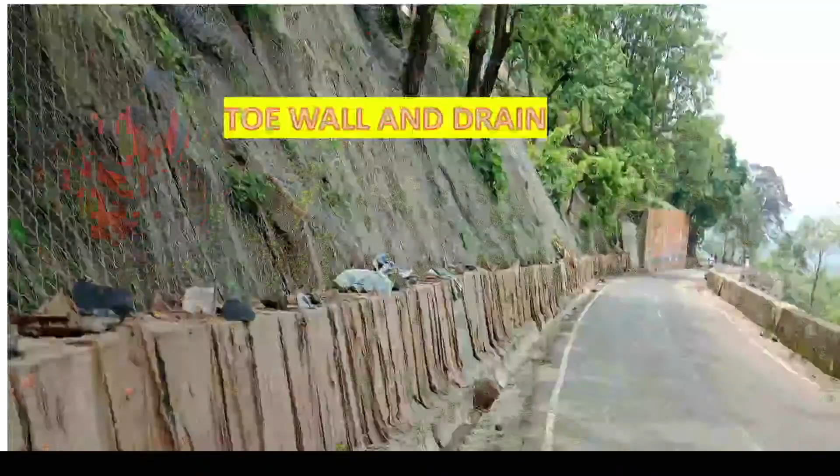So all these boulders and the grass seed on the jute textile, you can see the grass seed, and once you spread it here, this slope comes out green. At the base we have constructed a toe wall on the micro anchorages, and to control the drainage, all the small culverts were reconstructed, giving a bigger cross section to flow up the water.

These are the rock bolts, rock bolt in operation. These are the modified Gabion walling. These stones used to fall down with the movement of monkeys also, so nowadays they are to be kept in place. They have been properly arranged, stacked, and anchored with jute textile as well as the rock boltages.

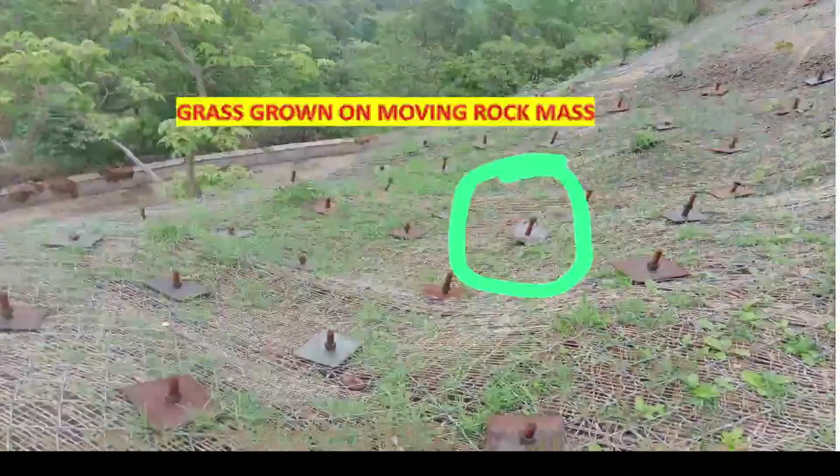Please conclude, sir. Yes, sir, conclude, Mr. Verma. Sir, so these are something like the project details.

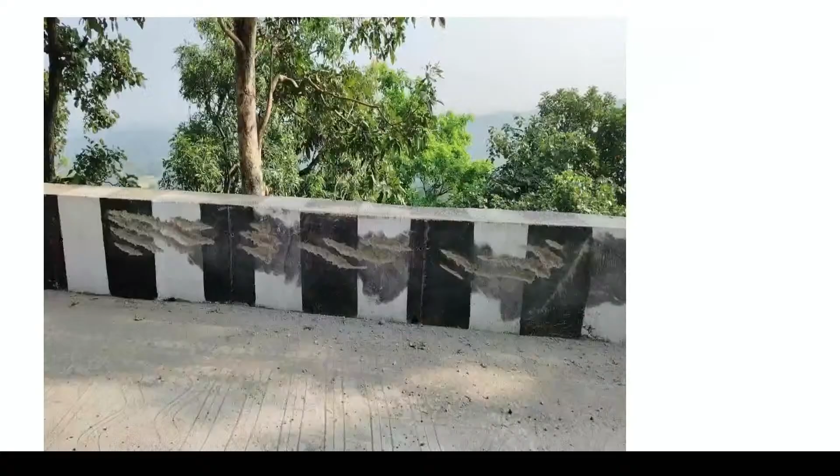You can see the photograph here. After some treatment, this area has come up green, and this has been monitored by all our managed professionals. Not only that, we have saved lives also, the road accidents.

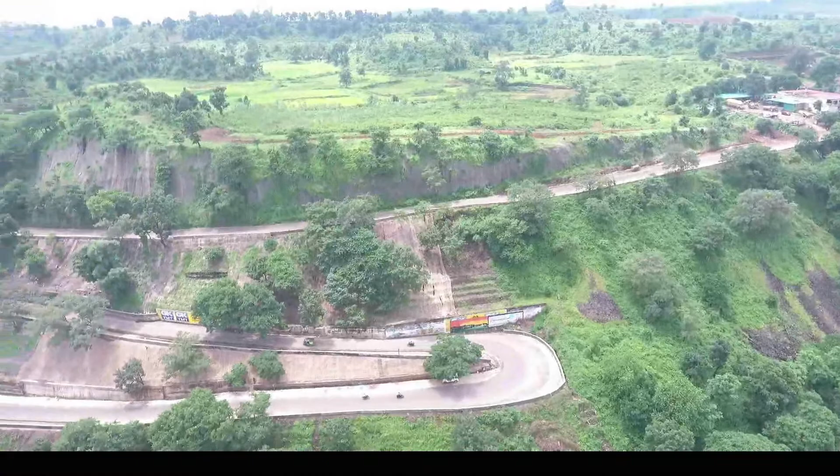So this is the photograph during the treatment from the drone. You can see the entire area has turned up so beautiful, like the place which used to be horrible once upon a time. Now it's a beautiful picnic spot, and we have created a platform over here to have a viewpoint as well as to enjoy the view of the valley. It's the famous Kirarghat Valley. These are the photographs from the drone.

I'll take one more minute, sir, just a few seconds. There is a small video which takes it to the ground, you have seen it from the drone. So now... please conclude, yes sir, Mr. Verma.

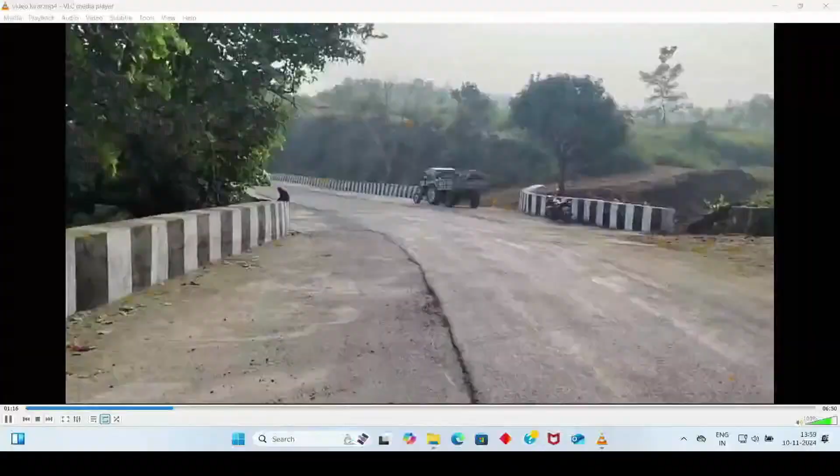So you can see the finished thing. Like earlier, the road which was very dangerous, not safe. Here we have constructed a special road safety wall at both sides, and particularly this safety wall has saved many lives. I'll show you one video where a truck loaded with 50 metric tons of coal had its tie rod broken, struck onto the toe wall, and gradually it slowed down. No damage to the road, no damage to the parapet wall, just a scratch, and many lives were saved.

Otherwise, think of the situation if the truck had fallen down from this slope. At least one or a few more vehicles would have come into that impact. Please take the questions, yeah please.

Hello, yes. So first of all, congratulations for such a good work, Mr. Sunil and the MP RDC team. Wonderful work, you have created such a picturesque view. Thank you.

It's commendable. Another thing close to my heart is that you have put the grass seeds, Sunil, are you listening? Yes sir. You have put the grass seed on the slopes for protection. I did this 30 years back on this VIP road, Lal Ghati, sir, and at that time there was no technology, no DPR, but it was so successful that the last gradient, which is even steeper than 1:1, is still stable after 30 years.